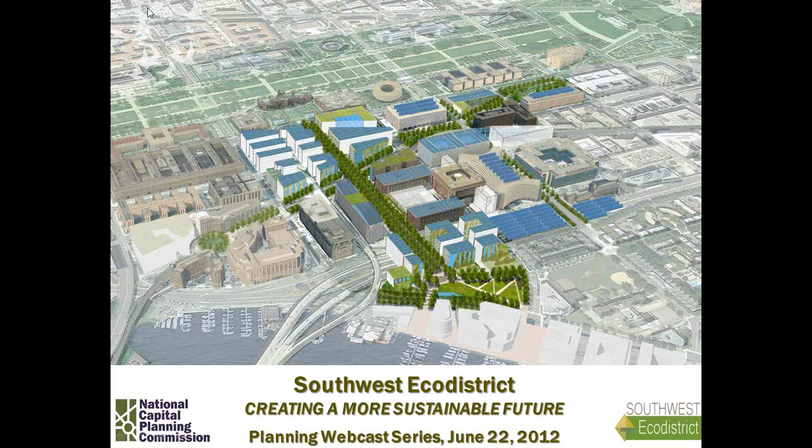And how we're actually taking this 110-acre area and turning it into a vibrant, highly sustainable, livable, well-connected community.

So many of you might be asking what is an eco-district. It's a term that is becoming more commonly used. In fact, we have about 5 different initiatives taking place here in Washington, D.C., and I'll be so bold to say that ours is probably one of the most ambitious. An eco-district is a comprehensive and forward-looking approach to urban sustainability and livability. The premise is that we're planning development and infrastructure at a neighborhood or district scale, which we believe can attain greater sustainability and economic benefit than planning at an individual building scale, which has been our recent focus. Now we're trying to move back towards that neighborhood scale.

I'm going to talk a little bit about why we think now is the time to capitalize on the momentum to do this, and then Otto's going to talk about how this area will actually become a highly sustainable mixed-use community, and the results we're going to be able to achieve. Then I'm going to wrap up about our cost-benefit analysis and the work we're starting to do there, and how we're looking towards implementation. We'll be happy to take anyone's questions to wrap up. So with that, I'm going to ask for the advance slide to get us started.

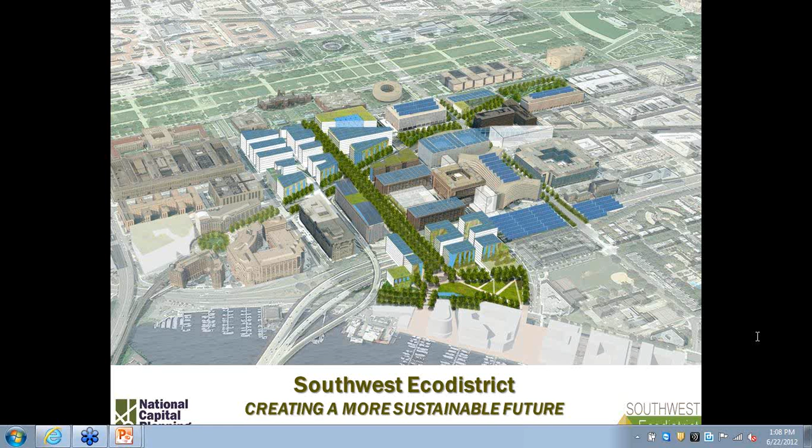Just a quick overview, as I said, I was going to give a little bit of the backstory of the eco-district work. This actually started back in 2005. There were 4 different planning initiatives going on within Washington in the Central City area.

We had the District of Columbia, shown in the light peach color. They were looking at how to focus economic development activity, and where they were going to concentrate their efforts to revitalize communities. The National Park Service was undertaking an ambitious plan on how to improve the National Mall, shown in green. And then the Architect of the Capitol was actually doing a campus master plan.

The areas in blue actually cover the area that the National Capital Planning Commission worked on, and how we were trying to improve the destinations and bring that civic quality of the mall off of the mall into the city, but also to start infusing the vibrancy of the city and downtown into our civic core.

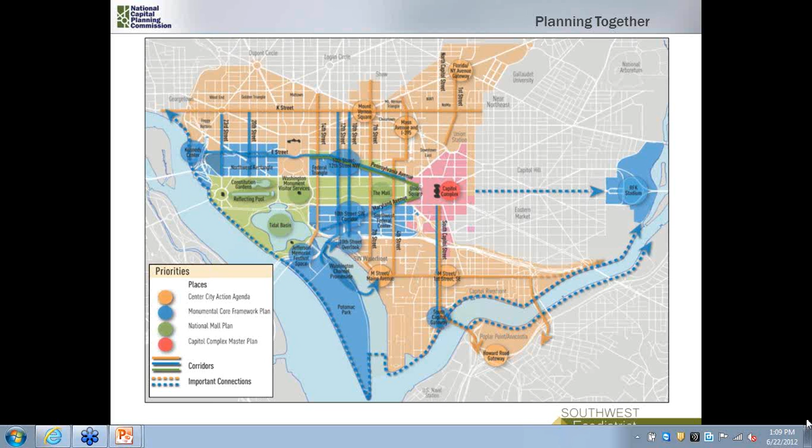What was interesting is a lot of people in the very early days were confused about how all these different initiatives fit together. So the 4 planning agencies got together, all the project managers started talking, and we came up with this diagram that really started to change the game. It became a very clear tool on how these 4 different jurisdictions, both at the local and federal level, were working together, and really how it started to make sense. The bubble areas show what we call our destination areas, areas we all agreed to focus on in trying to create new destinations or new communities. All of the lines show how we actually make connections between those areas.

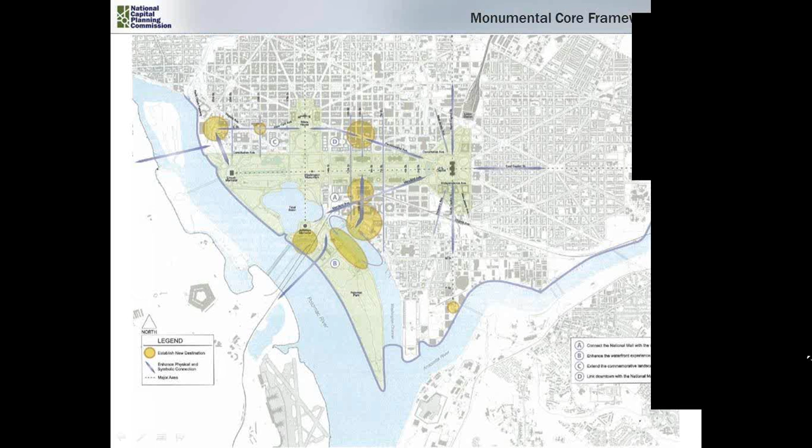Moving on. This actually is the monumental core. This shows where our big moves are, and we focus on the areas surrounding the National Mall. We actually pulled together a task force of federal and local partners, about 12 that served on that. It was actually a steering committee, and they basically helped set the direction for this overall vision.

As you all know, doing what we do as planners, we looked at these areas surrounding the National Mall and started looking at the different systems. Here in D.C., particularly, we're looking at views and symbolic connections, our land use mix, transit, and the public realm. We started to layer all of these to look at how we could create these great new destinations and connections within the monumental core.

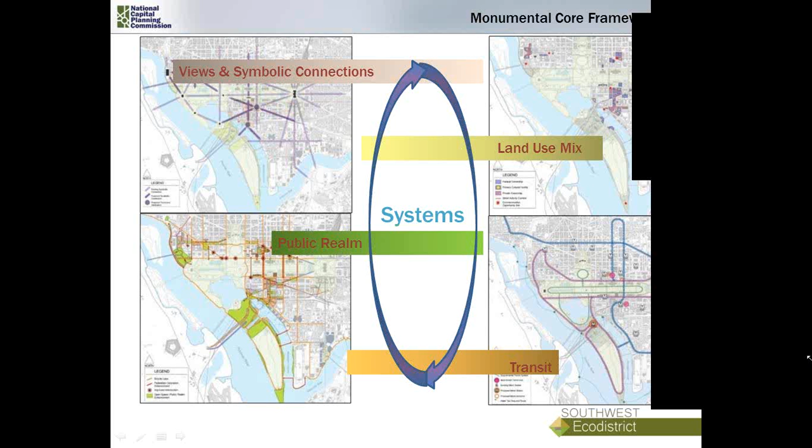This was deemed to be the cornerstone project of the Monumental Core Framework Plan because it's where we felt we could really achieve the greatest results. And quite frankly, it was also the area that needed the most help.

Just a little bit of background on how this area has transformed over the centuries. This was one of the first neighborhoods in Washington, D.C. Being on the Potomac River, it was part of the maritime industry and an important local port, and it was also near Fort McNair, an important military base at the time. It had a very fine-grained fabric of dense row houses mixed with stores and shops. It was a really mixed-use community.

As the city started to grow and develop, this area didn't get the attention it needed, and there were a lot of unsanitary conditions. By the 1930s, there was enough concern that planners started looking at how to revitalize it. The Capitol, which you don't see on this map, sits just off to our east if we're looking west. You can see the Washington Monument up there in the top right corner.

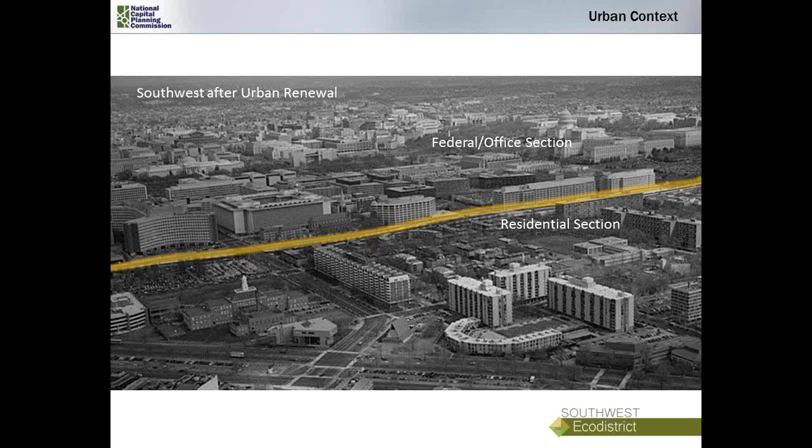This was during the era of urban renewal. The planners came in and basically razed about 400 acres of city fabric and displaced about 23,000 people, and essentially planned a community that looked much like this. They took that mixed-use community and created residential garden living areas to the south of the highway. The line going through the image is the southeast-southwest freeway, which we'll talk more about in a minute. The area to the north became basically an office park, predominantly of federal offices.

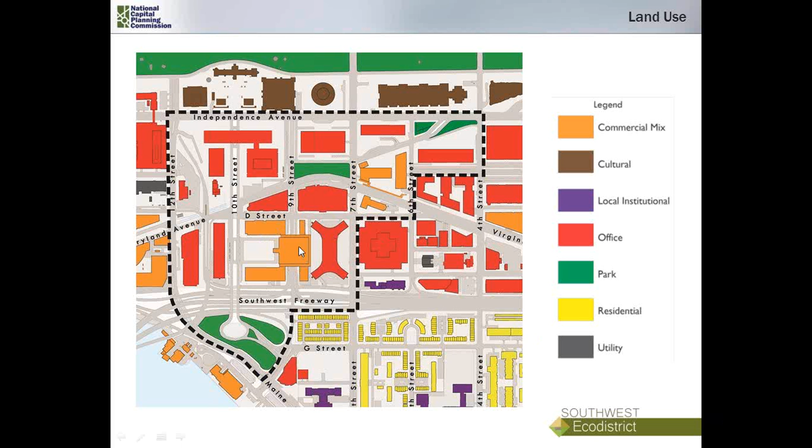I know that probably every area of the country has a part of their downtown with these kinds of conditions. So it's been a bit challenging figuring out how we actually transform these areas into a walkable, livable community.

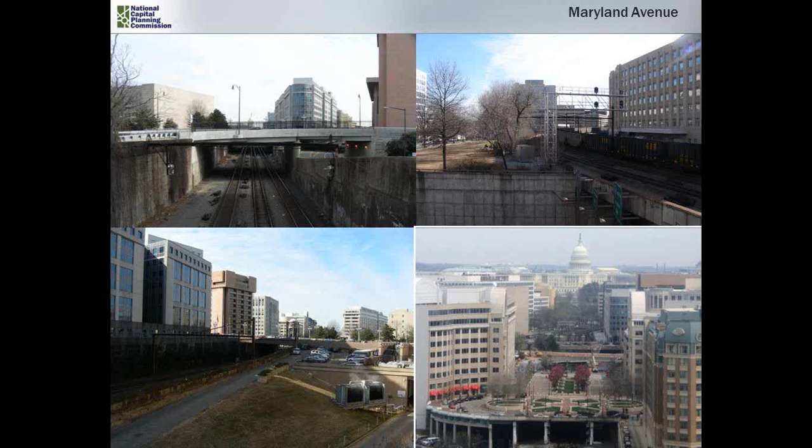Also going through our study area is a railroad that was built in the 1800s. This slices right through the community. Along this railroad, the buildings turn their back to it, creating a very industrial place right in the shadow of the Capitol. In the top left, you can actually see the Capitol peeking over that elevated bridge.

A portion of the avenue was actually decked over in the 1990s, shown in the lower right, and the Portals development was constructed. This is really the only accessible area from this corridor at this point in time. I should also mention this is Maryland Avenue. If you picture the plan of Washington, Maryland Avenue is the sister street of Pennsylvania Avenue, which runs between the Capitol and the White House. In this instance, Maryland Avenue is that link between the Capitol and the National Mall towards the Jefferson Memorial.

This is a freeway that runs through our study area as well. It's about 10 to 12 lanes of freeway, plus another 5 or 6 access roads. It creates a tremendous barrier in the community.

Because of having to get the streets in this area over the rail and the freeway, we have a lot of challenging level changes. This starts to give you a sense of some of the challenges we're facing. When you're down in this area of the city, it's very difficult to walk from point A to point B, and it's even confusing to drive.

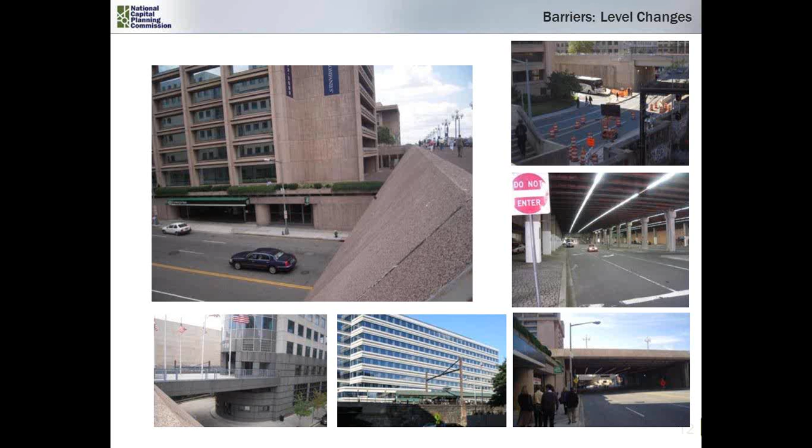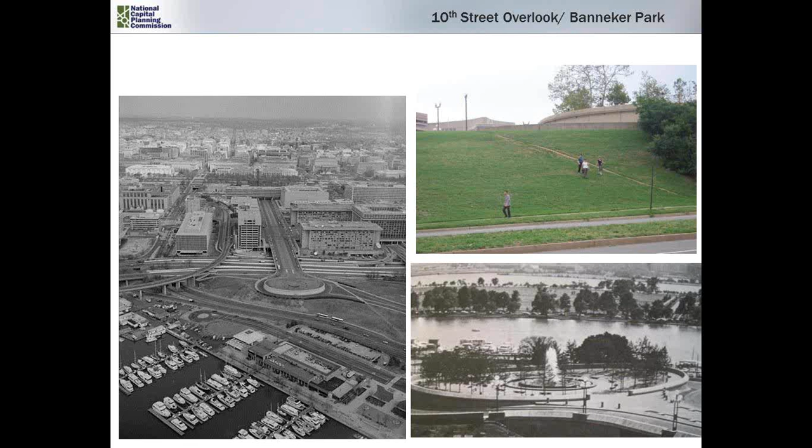So these are some of the challenges we're trying to correct in this area. I should note that the Kiley Fountain is entering the point in time where it could be deemed eligible for listing on the National Register, so this is one of the considerations we're having to think about in our planning work.

As we started our planning work—and this will become more significant as Otto talks about our recommendations—we're having to straddle what is historically significant, what should we start preserving, and what areas we can actually modify. These buildings, because of their relationship, urban forms, and architectural style, make it very difficult to weave them back into a more walkable, mixed-use neighborhood.

This is actually the Monumental Core plan. So we took all this information—this was the predecessor to the work we're going to focus on with you today.

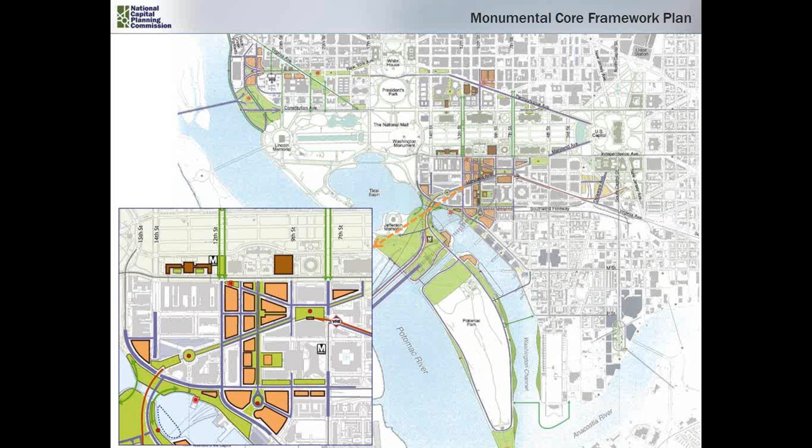This is the Monumental Core Framework Plan that looked at these primary destination points and where we concentrated our recommendations. I wanted to point out, as a contrast, in the bottom left, our initial concept for 10th Street, which heads south between the Smithsonian Castle down towards that cul-de-sac. When Otto gets into his presentation, you'll see how that vision has been refined and how it contributes to our eco-district goals.

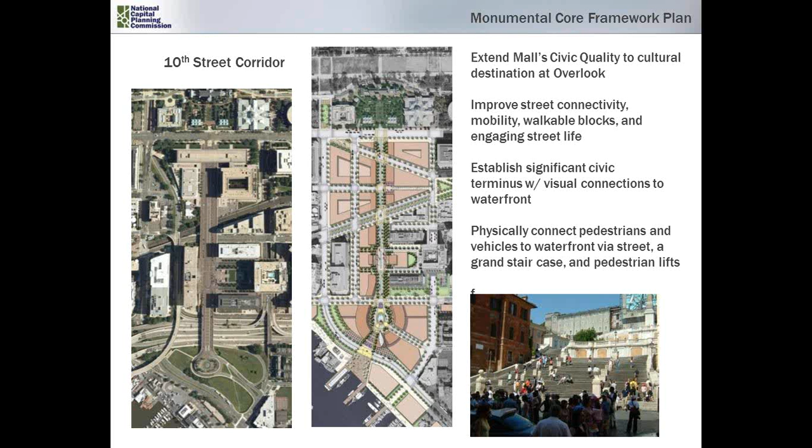This is just a close-up illustration of that. One of the things I wanted to talk about is when we did the framework plan, between 2005 and 2009, we brought together all of our stakeholders and pulled together a lot of good ideas that had been proposed by different planning efforts over time. So many of the ideas came from different places, with some new ideas as well. We reinitiated that planning process to bring current decision makers up to speed and help build a vision and consensus with them. This was a very dense urban idea—we never necessarily expected it would particularly look like this, but this is how we got started.

One of the very important things we did was really try to illustrate a feeling or context of what we were trying to create, to communicate the recommendations we thought were important in transforming this area. I'll note that in the very early days of this work, not all of our steering committee members were fully supportive. They thought our recommendations were a little too bold, perhaps too aggressive, and a lot of what went into our ultimate plan was very negotiated wording.

So a lot of the recommendations involved wordsmithing to get everyone comfortable. For example, one of the big recommendations that came out of this plan is that we redevelop the Department of Energy, which is the site shown here on the right, looking towards the Smithsonian Castle—a very different urban context.

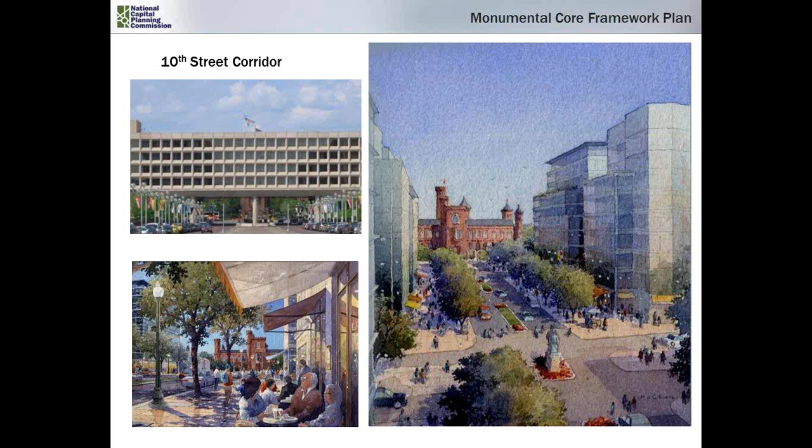And so the questions came up: well, where's the Department of Energy going to go? How are you displacing these workers? And so a lot of our recommendations took care of those nuances. And the reason I bring that up is that was really important in getting their buy-in to this, and allowing us to go to that next step that Otto's going to really focus on here in a few minutes.

Next, this is just another area of our plan. So I just talked about the 10th Street corridor, which is that north-south corridor there. It's hard to describe without a pointer. You need to kind of point where that is, because we're going to be referring to this a lot. Oops, maybe not. Sorry, technical difficulty.

Anyhow, so that north-south street is called 10th Street. The diagonal street that goes from the northeast to southwest is Maryland Avenue. And that street is actually that rail corridor that I showed you a picture of a little bit ago. You can see that rail corridor there in the bottom left. And again, this is just some of the big vision ideas that we use to build our recommendations and to start to build some consensus around how we might transform this particular area of the city.

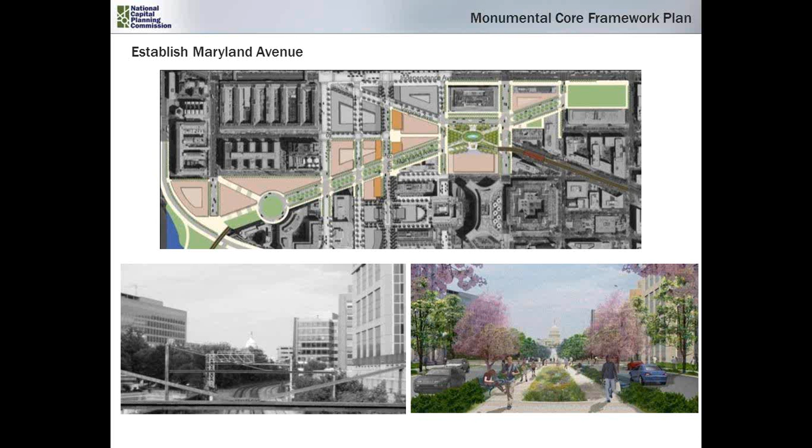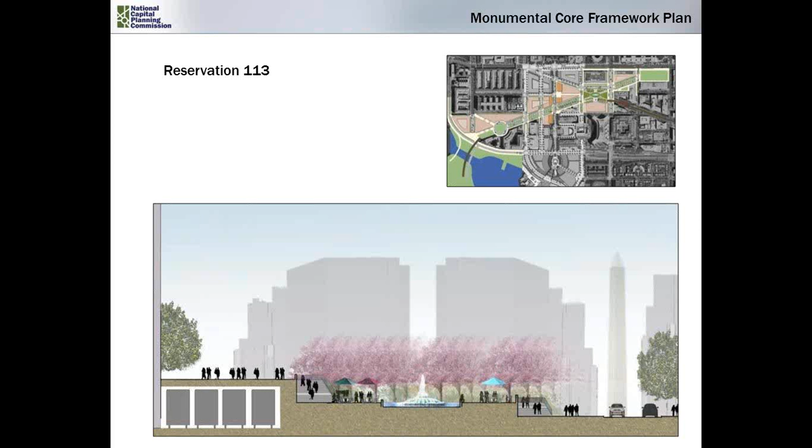And I really wanted to put this up because one of the most challenging areas within this plan is how we would actually deck Maryland Avenue to maintain rail service through this area, but also make it a pedestrian place. And the section here at the bottom is actually the park shown in the upper plan. That's a very important reservation in Washington. It's actually the cross-axis of Maryland Avenue and Virginia Avenue, and on axis with the Washington Monument. However, if you were to stand in this park today, you wouldn't see the monument because the Department of Energy is actually blocking it. So this proposal shows the kind of view corridor we might be able to recreate with this new planning work.

So the Monumental Core Framework Plan was about a 4-year process to go through all the planning work, the public process, the consensus building that was necessary to get it approved. And it had 3 main goals. One was to protect the National Mall and create new cultural destinations off the mall, but also to protect the federal office space, as well as create new places to work, live, and visit, and how we could actually transform the 10th Street and Maryland Avenue corridors into this vibrant mixed-use community.

I would also like to point out another part of the backstory: when we started this work, our intent was really to protect the National Mall and find new cultural destinations. As we got into the work, we realized we really couldn't do that until we met those last 2 goals, which was also how we're going to protect the office space and how we're going to create a mixed-use community. So it turned from improving the settings for future museums and memorials near the mall to more of a revitalization plan that would really create a true community.

So a lot of the work that Otto's going to talk to you about came from this foundation, but another critical point in the process that really helped us gain a lot of momentum was Executive Order 13514, which is Leadership in Environmental, Energy, and Economic Performance. This was an executive order signed by President Obama in 2009, and it basically was a transformative shift in how the government does our business. It makes greenhouse gas emissions a priority for us and how we can reduce those gas emissions and really become a leader and push that industry forward. This executive order gets very specific on the targets for energy, water, and waste reduction, and we use those targets as one of our bases for setting our goals within the eco-district.

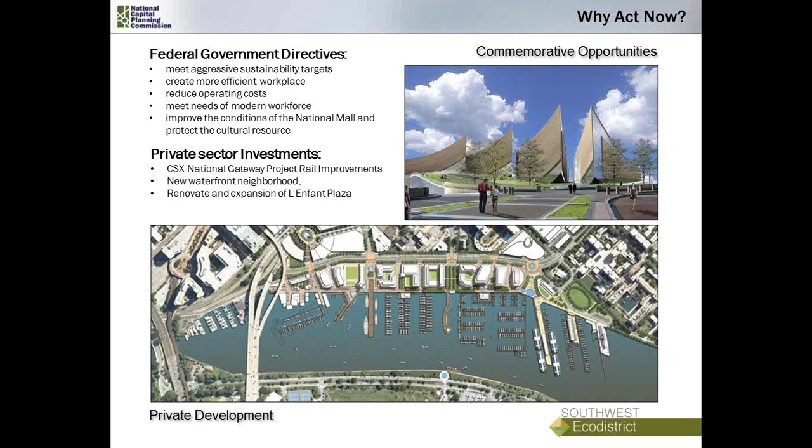So I covered this before, but just to recap, and I'll start to hand this over to Otto—so what is an eco-district? Here in D.C., as I said, we've got about five going on. One in our downtown area is looking primarily at energy amongst a large group of private office buildings.

The District of Columbia is looking at doing an eco-district master plan for a former federal campus that's going to be going private. So what I'm trying to get at is that all these eco-districts have a slightly different definition. This sets up the definition we're using for our eco-district, and our main objectives are to capture, manage, and reuse energy, water, and waste beyond a single building to a group of buildings, handling those resources within our eco-district boundary.

So we basically want to use and reuse energy, water, and waste to make those resources most efficient within our study area. But we also recognize it includes important transportation choices as well as a mix of uses that will create a neighborhood. And in order to be a successful neighborhood, we need a connected system of parks, plazas, and open spaces to make this a walkable community.

So a lot of our specific recommendations, strategies, and guidelines contained within our plan actually go toward trying to meet these particular objectives.

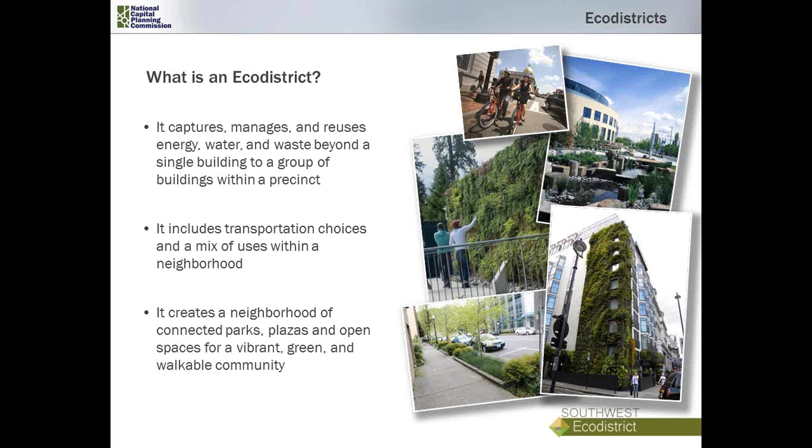This is the study area I wanted to mention here. The red boundary shows the area that the National Capital Planning Commission focused on with our task force.

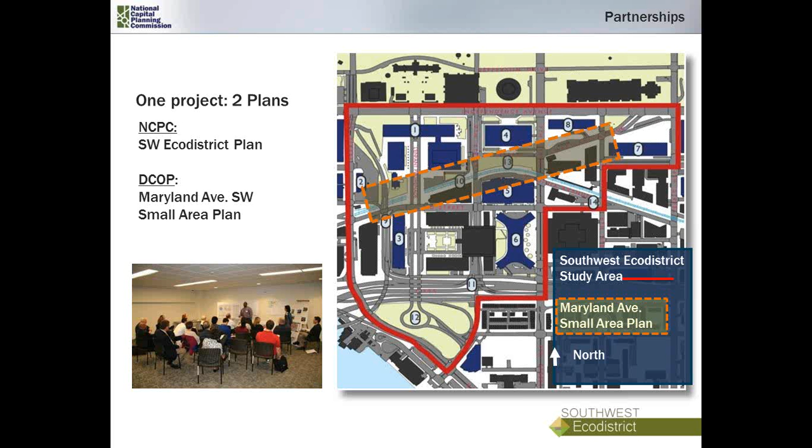After we finished the Monumental Core Framework Plan with that 12-member steering committee, we formed a 17-member task force. That task force focused on the area within the red boundary, but the District of Columbia had a specific interest in the area within the orange boundary, the Maryland Avenue corridor. So essentially this project, even though it's one project, had two very important components, and it established a close, collaborative, cooperative working relationship between the federal government and the District of Columbia, which isn't always easy since we sometimes have competing needs.

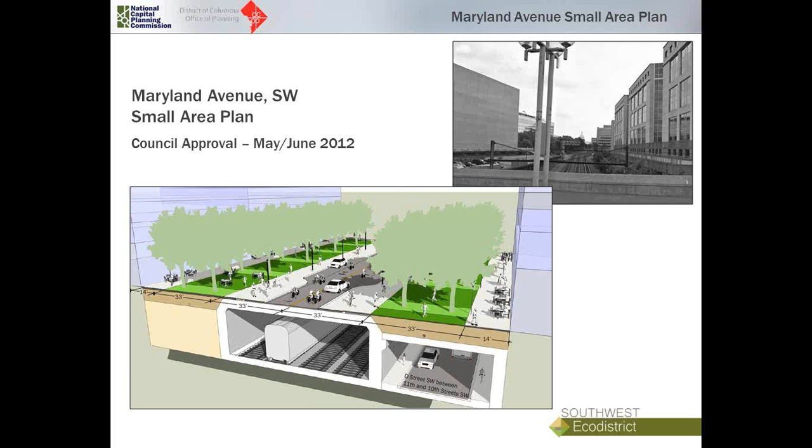We just attended the Maryland Avenue plan, which was just before the City Council yesterday, on Wednesday. So that plan is in the midst of obtaining council approval, and they're currently looking at how they might actually fund some of these improvements.

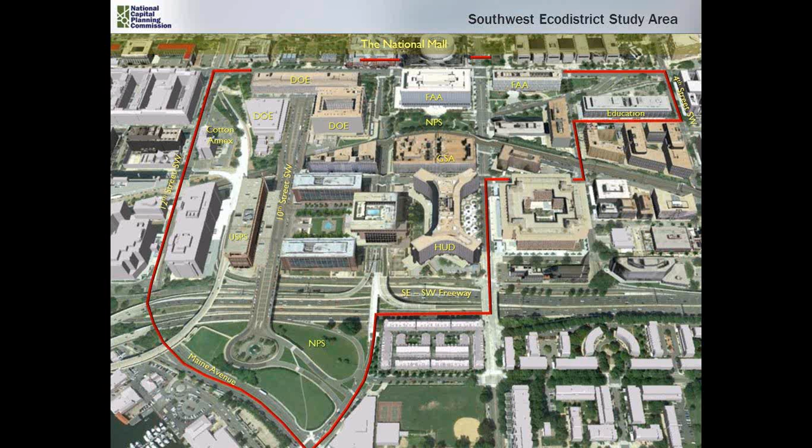And so this is our study area, what it looks like today. Talked a little bit about that already. It's about a 15-block area, 110 acres. About 60% is owned by the federal government, about 22 to 25% by the private sector, and then there's about 15 to 17% that is actually infrastructure. So infrastructure takes up an incredible amount of real estate within this area.

So our mission is really to transform the 10th Street and Maryland Avenue corridors into this well-connected place where we can commemorate, live, work, and visit, but to do it in a way that showcases sustainability. And that's what we're going to be focusing on with you now. So next slide, please.

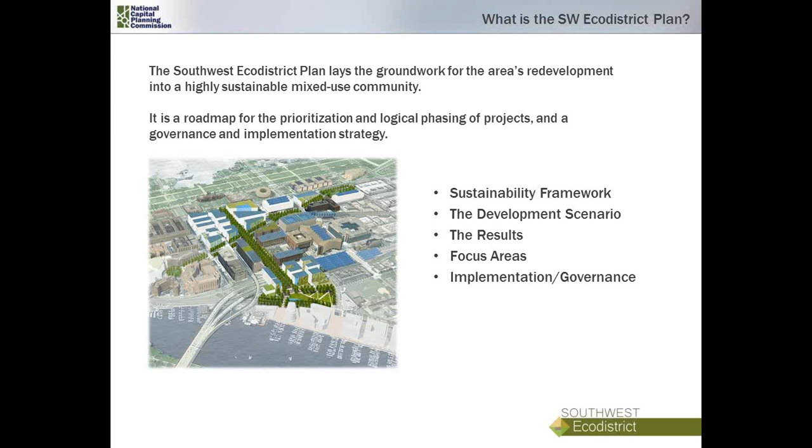Before I hand it over to Otto, just wanted to mention that we are in the midst of literally doing the final edits to our draft plan. You're actually getting a preview. This plan has not yet gone fully public. We're going to be taking it to our commission on July 12th and releasing it for public comment on July 12th. There'll be a 60-day public comment period before we incorporate those changes to wrap it up and take it back before our commission for approval. Next.

So I'm going to turn it over to Otto, who's going to talk about how to achieve a highly sustainable mixed use. No, I'm not quite yet. I'm sorry. I've got a few more slides, and I'll turn it over. So now we're going to talk to you about how we're achieving this sustainable mixed-use community.

Just some background. Before we actually started looking at our strategies, we did a market study. The city actually helped pay for this market study, but we looked at the market within this area, and we used this study as a basis to help us set a baseline for what our use mix might be for a successful mixed-use community.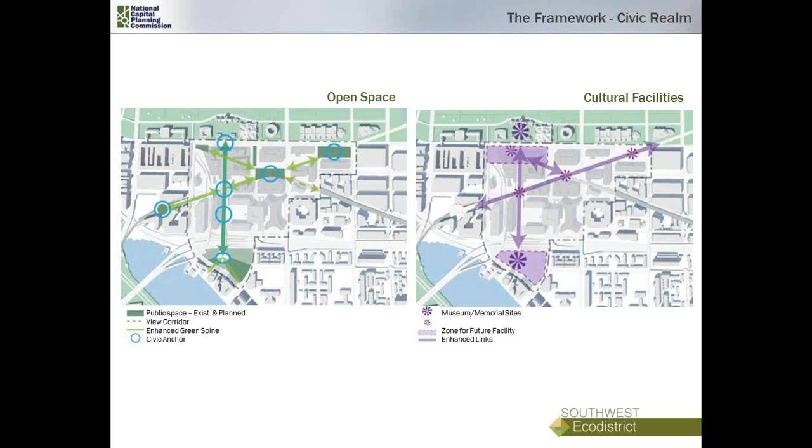We then focused in on the systems within this particular area. So we looked at our open space system and how we could connect these important public places, how we could create these new cultural destinations, and how this open space system and these cultural facilities would relate. We also looked at our land use mix, which is basically a mono mix at this point. But we looked at where we would focus our federal and cultural uses and where we would focus our mix of uses.

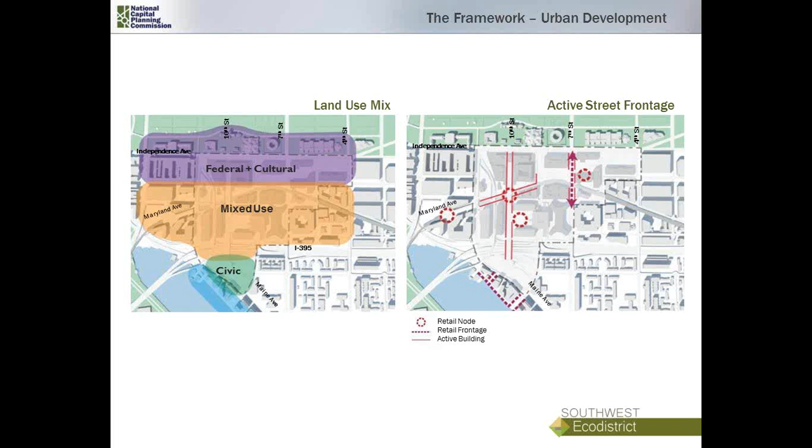I would like to note that this doesn't mean that you wouldn't have a private development in that federal cultural zone, but what we're trying to communicate is that within that zone, we want it to feel like it's part of that civic community, that it's part of that monumental core. It has an identity more like what people perceive as the nation's capital versus a maybe a little messier, more vibrant mixed-use area.

We also did a couple of different transportation studies as background work. We did a pretty extensive study looking at all of the elevation changes within this area and how we would actually connect the street grid, physically how we could make vertical connections as well as horizontal connections. This was very important in basically eliminating potential development scenarios that just wouldn't be feasible.

And then, once we came up with our development scenario, we did a broad conceptual transportation analysis, at least at this point in time, to give us a sense of what kind of additional automobile traffic we may generate versus what transit.

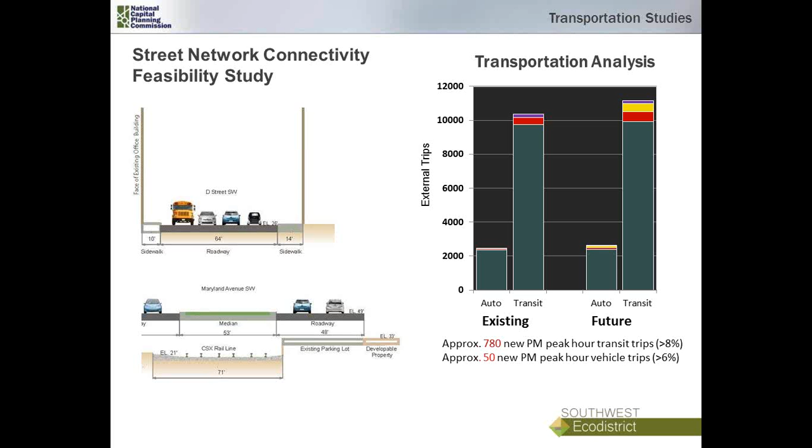One of the things I should mention is that this area of the city is probably one of the most transit-rich. It's got 4 metro lines that come into it. There's 70,000 employees that work within this area. And what's interesting is that the transit system is actually starting to operate at capacity. So one of our major objectives is to look at how we can expand the capacity and actually bring more commuters into this area.

So these two diagrams start to show the street grid. So one of our main objectives was how we could revitalize this area to reconnect the street grid, basically kind of minimize all those different vertical elevation challenges that we have so we could get better connectivity within the area. And then we also looked at how we would bring in all the transit to an important transit and intermodal hub within this area.

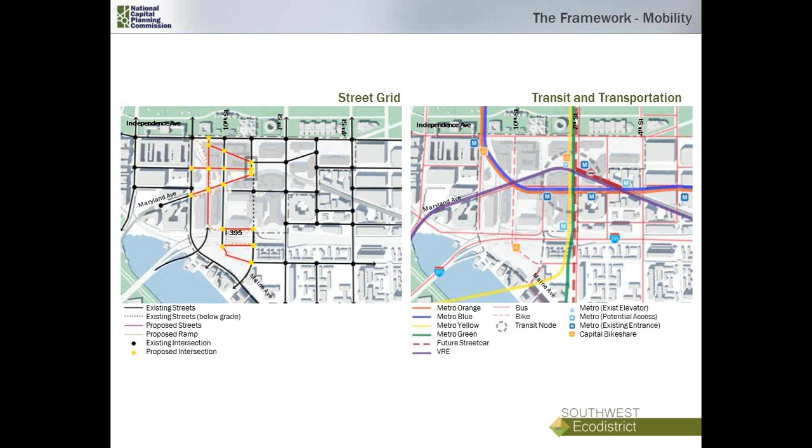And the other thing we looked at was the character of the streets. So our guidelines start to set up strategies and recommendations on how we make sure that we start to blend the federal city with the local city in a way that respects both but also begins to integrate them. So we have civic streets, monumental streets that might feel more like the federal city, but also start to bring in a mix of use.

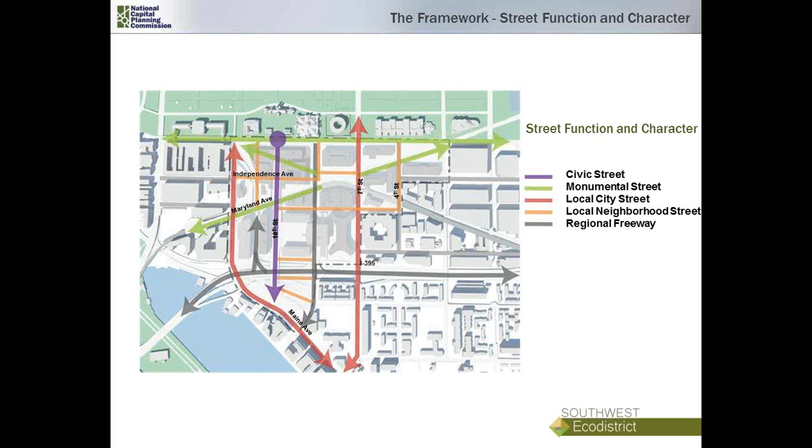But then we also have those streets that help the city function well, which are those local city streets that bring commuters through, as well as the local neighborhood streets that support a lot of the functions that are needed to make these buildings viable. So with that, I'm going to turn it over to Otto, who's going to talk about our sustainability strategies and recommendations.

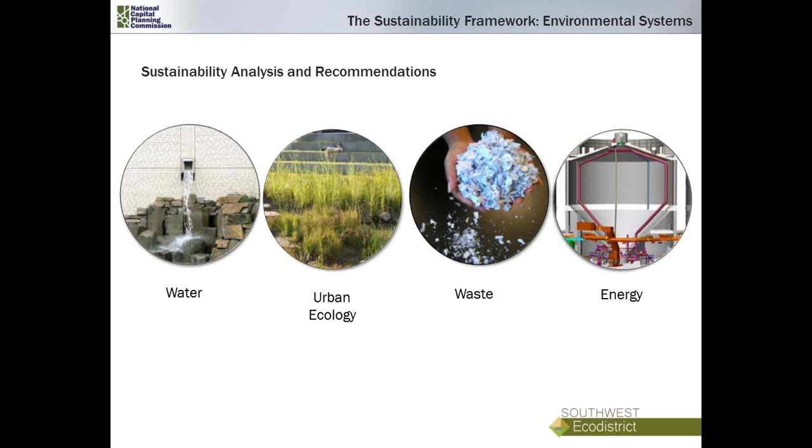Thank you, Elizabeth. To complement the design physical framework, we did identify the four areas for sustainability strategies, which you see on the screen are water, urban ecology, waste, and energy. Working with our consultant doing engineering for us, one of the charges of the plan was to make a business case. So to do that for sustainability, we really needed to find out the metrics of all of our recommendations.

So what you see here is a couple spreadsheets, but we basically did some conceptual modeling, first starting with all the existing information we had from square footage, the energy use for all the buildings, the population, the water use, all the waste and recycling that was done for the buildings. And then as we started to build scenarios, we could identify what the population increases were, the water use changes were, the energy use for the buildings, based on different recommendations for how the systems may be applied to rehab or for new construction.

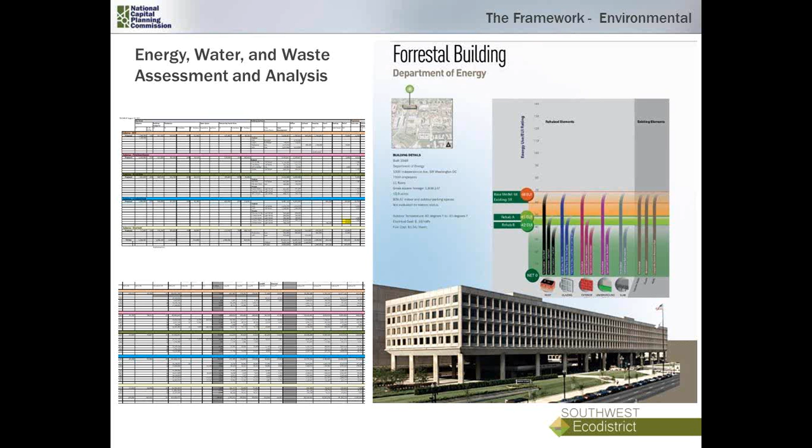The first thing to talk about is the water. So if you take the study area, about 92.4 million gallons of water fall on the site. In DC, stormwater management is a critical issue. Working with the EPA as one of the task force, they identified that the water that fell on the site did not need to go back into the Potomac, which said that we could actually collect the 92.4 million gallons and use it for replacing potable water, since right now potable water is used for everything.

That's also part of the executive order, to reuse all the rainfall from a 95th percentile event. In terms of the potable water, right now it's about 18 gallons per square foot. As we looked at all the future development, our target was to hit 9 gallons per square foot.

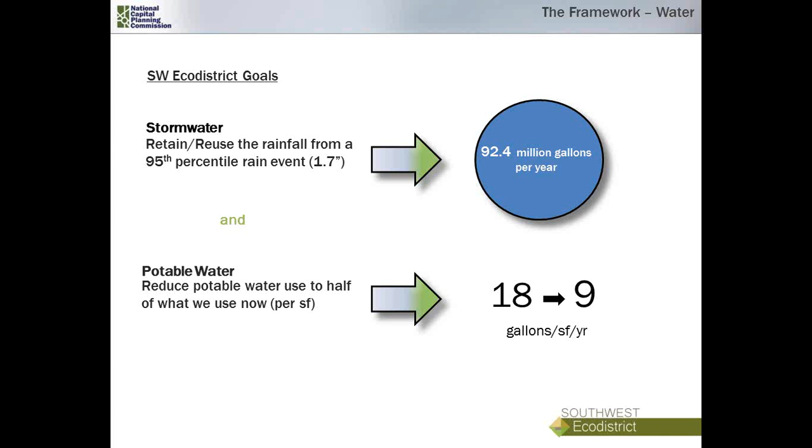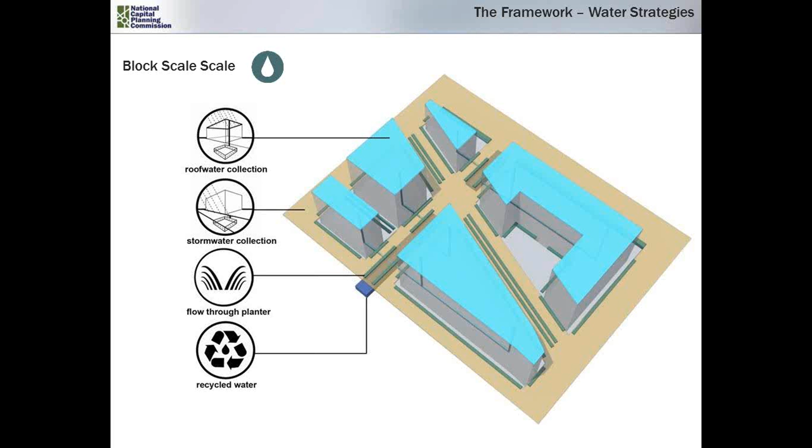To do this, we were looking at collecting stormwater off the roof, collecting it on the ground, using flow-through planters to support better irrigation, and then also recycling water so that we could basically create a gray water system for the flushing of buildings and non-potable uses.

One of the critical issues for doing stormwater collection at a district scale is that current regulations require that right-of-way collection is done by the district and individual properties is done by the properties, and combining the two isn't allowed. So it's one of the pilot recommendations that has come out of the plan that we can actually collect stormwater across properties to use for a district collection system.

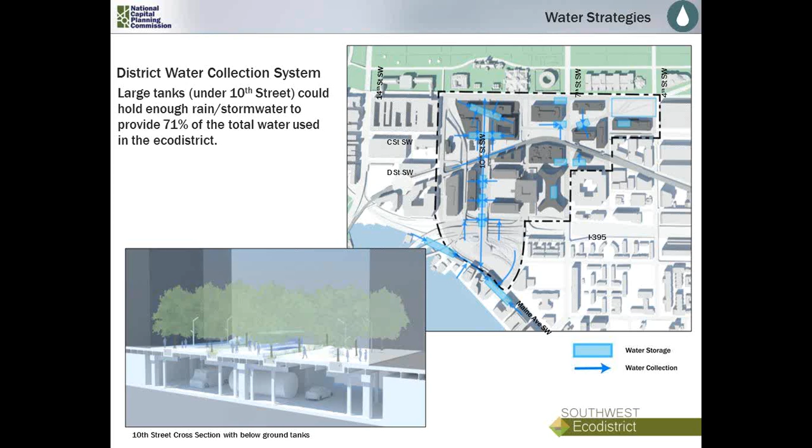Urban ecology. In looking at the water strategies, we wanted to use the stormwater so that it would actually help to create an environment on the street level that people can experience and that can help to reinforce the natural habitat. So the idea was, and I'll get to it later, that maybe green roofs aren't the best use if we're trying to also do energy, but to actually bring the stormwater down to the ground. That will help to reduce the heat island effect, help the vegetation along the ground plane, and really promote green infrastructure that creates a better place that people want to be, which right now, as you've seen in some of the photos, is really pretty much a concrete wasteland.

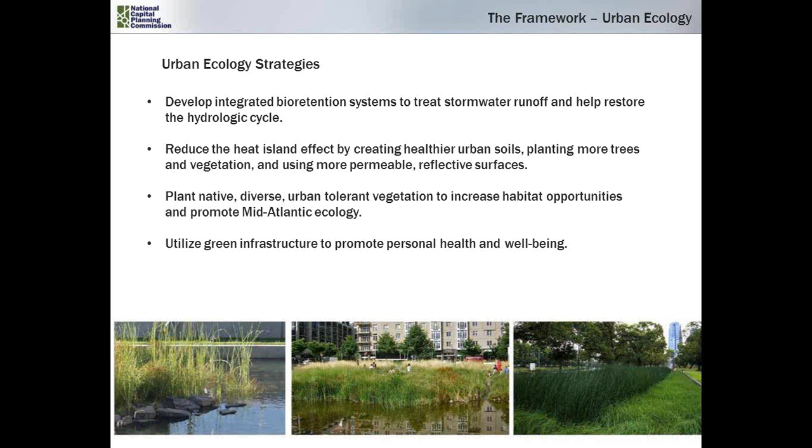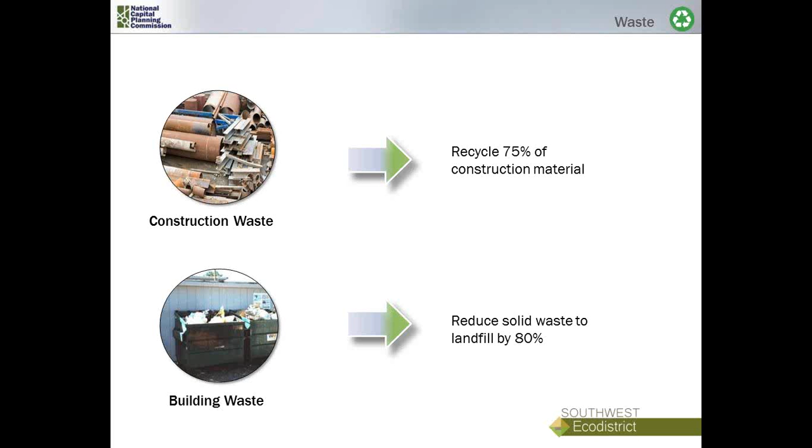So for construction waste, as we're looking at all the new construction, the goal is to recycle 75%, and for building waste, right now it's about 30% in some cases, really to reduce all that, reduce the solid waste that goes to landfill by 80%.

Our recommendations are really built on 3 tiers. We started looking at the building scale, which is really what you might sort of parallel with LEED measurements. And part of the eco-district is that it has to go beyond a simple building scale. So then we built up to a block scale and finally the district scale.

In terms of waste, the diagram here shows that at the block scale, which is essentially, or what's illustrated is the north end of 10th Street, showing that each of the buildings can have a recyclable waste. Black water will be collected.

We did look at a black water system for the district, which can be pretty expensive, and as the District of Columbia is now looking at an anaerobic digester down at the Blue Plains facility, one of our recommendations was to actually not try to handle black water within the district, but actually use the District of Columbia system.

We are also looking at collecting the gray water for new construction when there's a dual pipe system, so that can be channeled into the cistern and then recycled and cleaned.

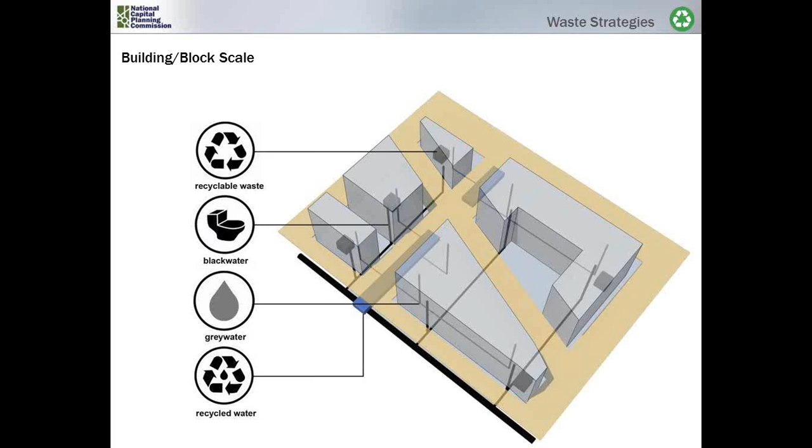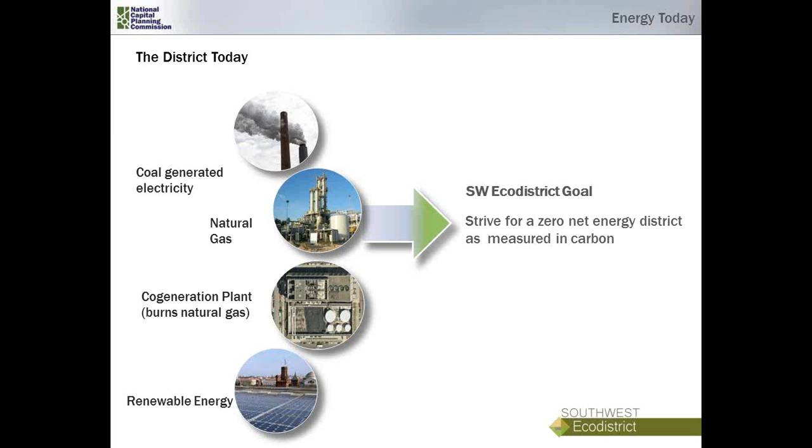Energy is probably the biggest strategy for the district. Fortunately, there's currently a cogeneration plant in the area which burns natural gas. As part of the target was to hit a zero net energy district as measured in carbon. Currently, the cogen plant burns natural gas. So down the road, I think 2030, to actually hit net zero carbon, it will need to be a decarbonized system, which there are some technologies so it's not burning natural gas. It can be things we're still investigating.

As we look at the buildings, the building improvements, as you saw in some of those photos, they're 1970s buildings. Their skins are pretty inefficient. A lot of them are basically failing. So our strategy looked at, and we did modeling, was what if we rehab the buildings lightly, which is basically all the systems, versus doing a full rehab of a building, and then comparing that to new development.

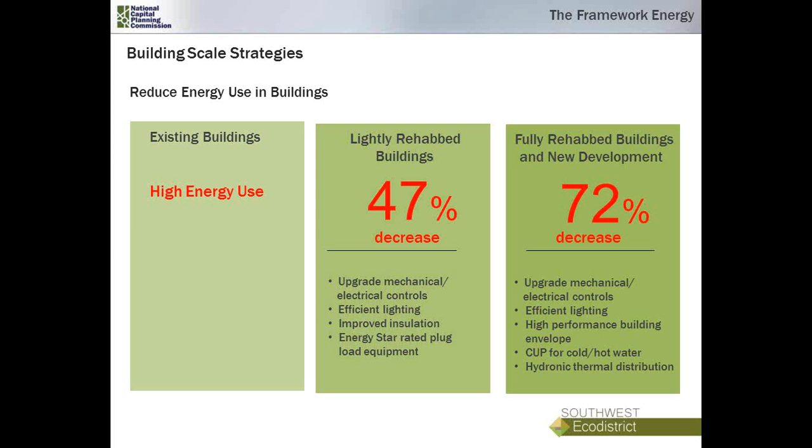By doing light rehab buildings, which is upgrading the mechanical systems, improving the lighting, improving insulation, and addressing the plug loads for all the equipment, we could probably get a 47% decrease in energy usage. If we fully rehab the buildings, which is basically ripping them down to the structure, or a new construction, we would basically have a 72% decrease in energy usage.

As we look, that was for the buildings. For the district, and for the block scale, we've conceptually modeled how much solar thermal we may use on our rooftops, how much solar PV we would use on all the rooftops.

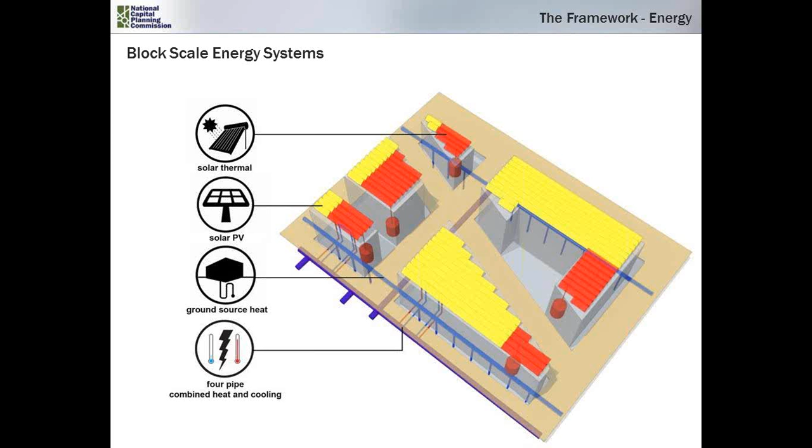the cogen plant. Another issue that will need to be addressed to make the district system the most efficient is to balance the daytime uses of office with residential and hotel uses. Currently, by congressional rule, we cannot connect private buildings to the cogen plant and that system, so that is another recommendation, that we have to kind of think outside the box to allow private sector, non-office development to connect to the cogen plant to actually make it the most economically efficient system possible.

We're also looking at sewer mining, which is essentially ground source heat, to, on the southern end of the district, absorb the heat from sewer water, which comes out of the buildings at anywhere from room temperature, 72 degrees, so we can actually absorb the heat off of that to provide heat for the buildings. It's another technology that's used in France and around the world. It's been pretty popular now in Vancouver, BC, and it's something that it's time for it to do in the U.S.

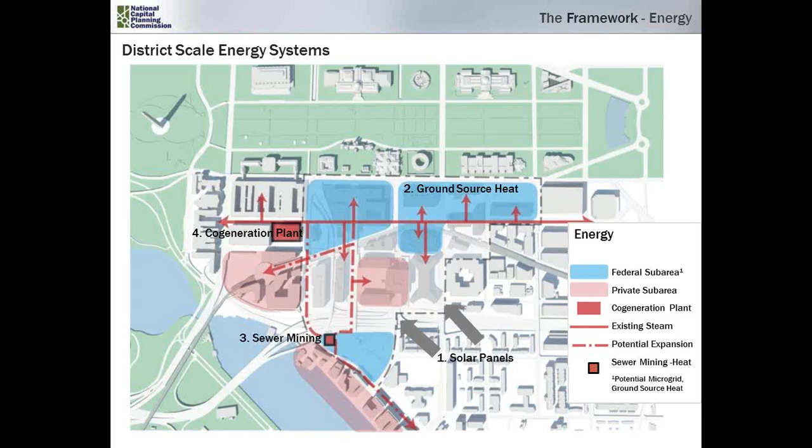When you start a plan like this, the RFP often says you have to do so many scenarios, like you figure you're going to do 3 scenarios. But as we were modeling our various strategies, it wasn't an idea of scenario 1, 2, or 3. It was actually a more holistic strategy that evolved, with multiple approaches in order to achieve all the goals we were trying to hit.

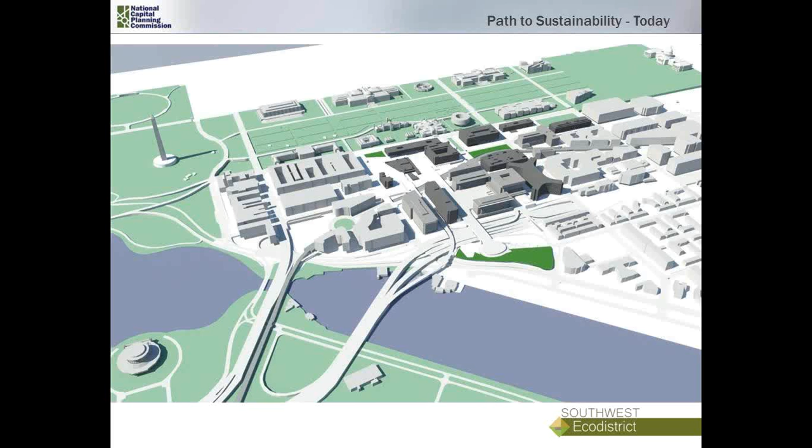So this is a sequence going through the strategies by building scale on what would need to be done to achieve all the targets for both environmental goals and creating a sense of place with population and mix of uses. Here, all the light gray are private buildings. The darker gray are all the federal buildings within the district.

The building to the north of that is, there's the 2 FAA buildings. That's Orville, the FAA building, and the other building to the right of it is Wilbur.

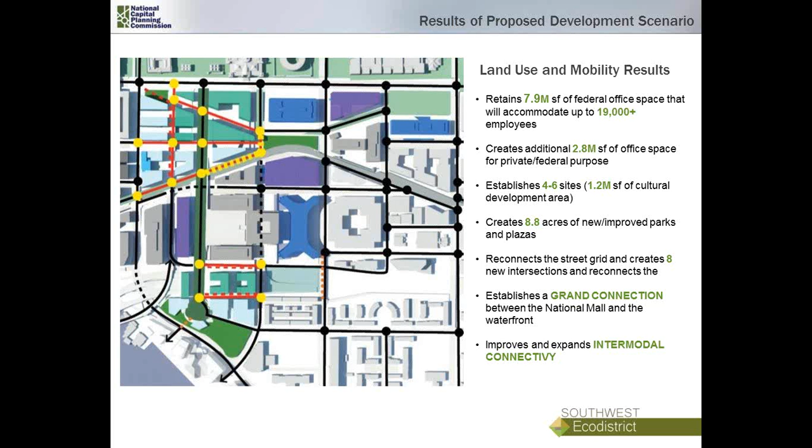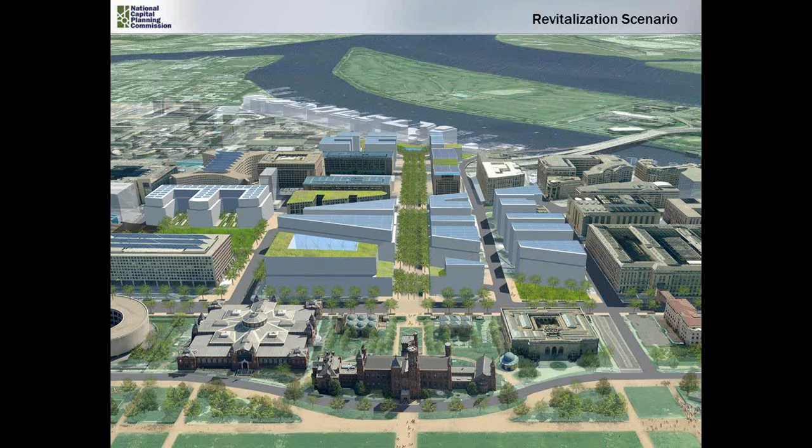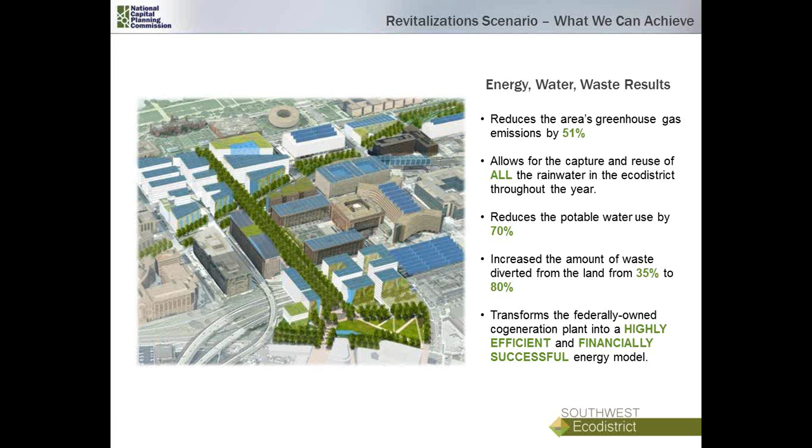So what are the energy, water, and waste results? With the development and all the strategies, we can reduce the greenhouse gas emissions by 51%. We plan to use all the rainwater within the site, reduce the potable water use by 70%, and increase the amount of waste diverted from landfills from 35 to 80%.

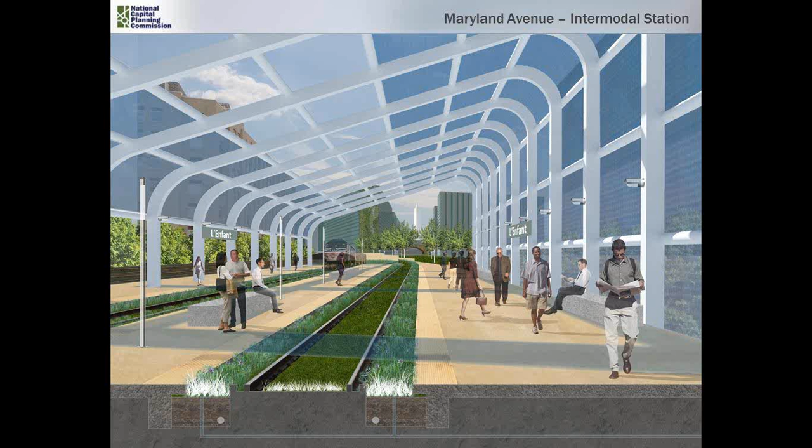Here you see that the DOE site has been redeveloped to create the view to the Washington Monument. The idea is that the transit facility could be redeveloped—we're showing grass tracks because every strategy to capture stormwater would be used, creating canopy which would be photovoltaics to provide energy and also some protection from the heat of the summer in DC.

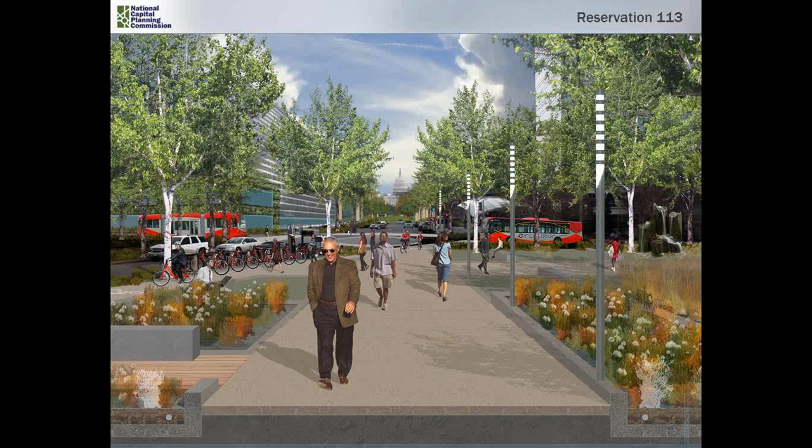Here's another view from Reservation 113 looking up to the Capitol, the existing view. Here's a revitalized, redeveloped Reservation 113 Park, which would have extensive native landscaping and stormwater management. You see the streetcars coming in to the left. It becomes the transit hub connecting the existing regional train system, the metro system, future streetcar, and future buses, while creating a strong connection back to the Capitol.

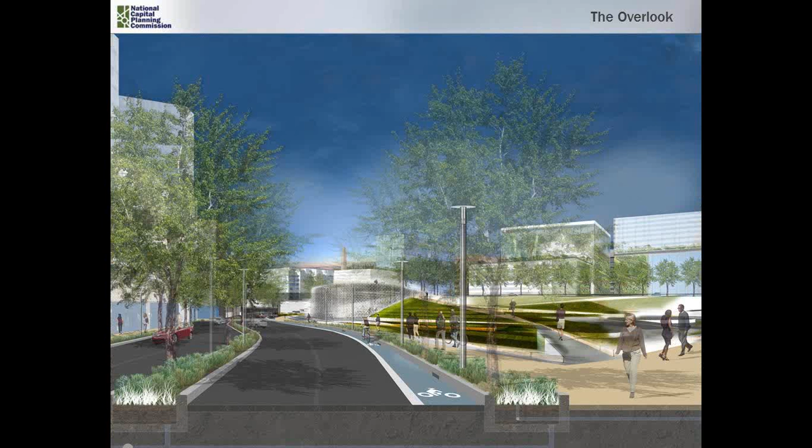The idea is that this would really become a high-performance demonstration extension of the mall. Instead of being down on Maine Avenue, you can look here, and the green will pull you up into 10th Street, so you really feel connected back to the National Mall. We're showing an overlook.

We're showing multimodal connections along the street for bike improvements, and the images to the left are the future developments along the riverfront. Again, trying to think of all the views, here showing the visual connection back to the Washington Monument.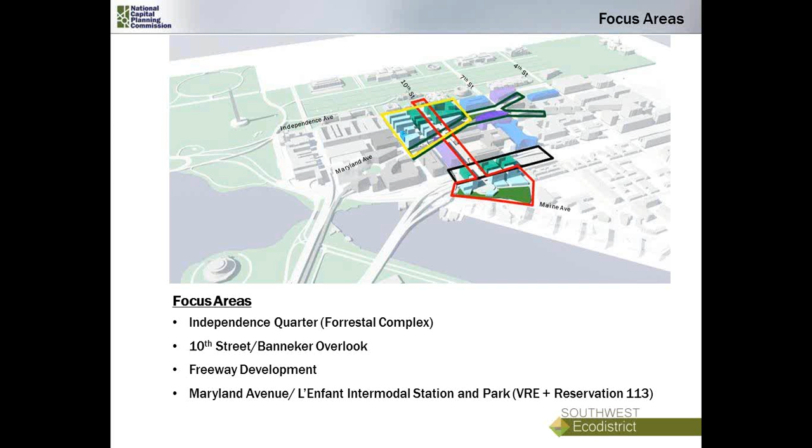So there's a lot of recommendations. To make it more manageable, we've identified 4 focus areas: the Independence Quarter, shown in yellow; the 10th Street Banneker area in red; the freeway, the black rectangle; and the Maryland 7th Street transit complex in green. When the plan is released, there'll be a lot more detail on each of those areas, in terms of recommendations for projects and who's supposed to partner and be responsible for certain aspects, so it becomes more manageable to actually implement.

So I want to talk a little bit about 10th Street. As you've seen in several photos, it's really a concrete wasteland—if you try to walk there in the summer in DC, you might not make it because of heat stroke from just walking about 3 blocks.

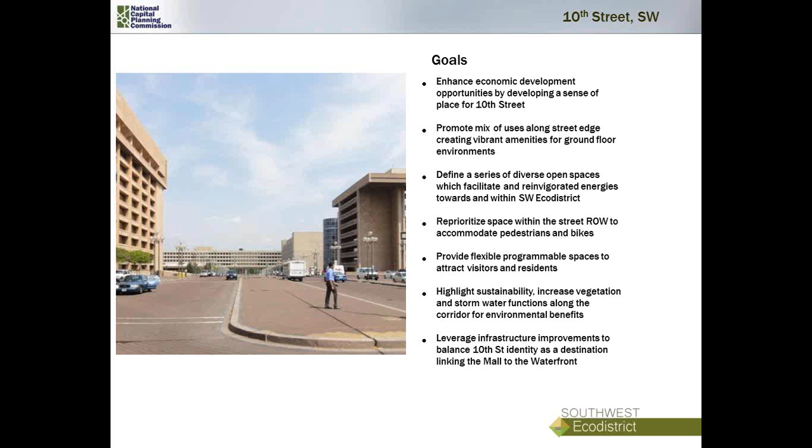So one of our first strategies was to think about, as 10th Street becomes redeveloped, the opportunity for infill and landscape interventions within the street right-of-way for stormwater management, that the buildings adjacent to the properties have to really embrace a vertical and green approach, and then the infills themselves may be either commemorative or part of the landscape. These are just some examples we've been using to illustrate the ideas that might be developed.

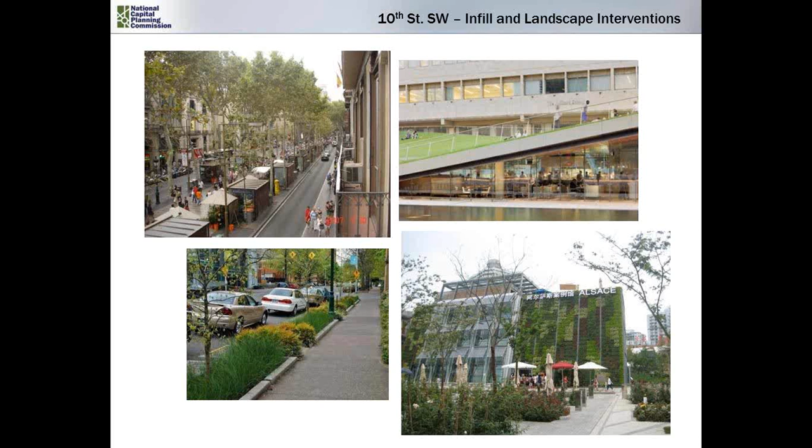Currently, these are 3 just preliminary approaches or concepts that we've developed. The next phase is to develop them further.

These were done in order to identify how much area we may be able to capture for stormwater management, and what the sense of the space might be—currently the right-of-way is about 225 feet, building face to building face. If we narrow it down to a more typical DC right-of-way, about 110 feet, what does that get us in terms of land development, and what's the resulting public space?

So these are 3 preliminary ideas—actually 4—looking at the creation of nodes, shown in pink and yellow, of plazas or infill features, and also how the roadway and the tree canopy might interplay to create a sense of the appropriate monumental street.

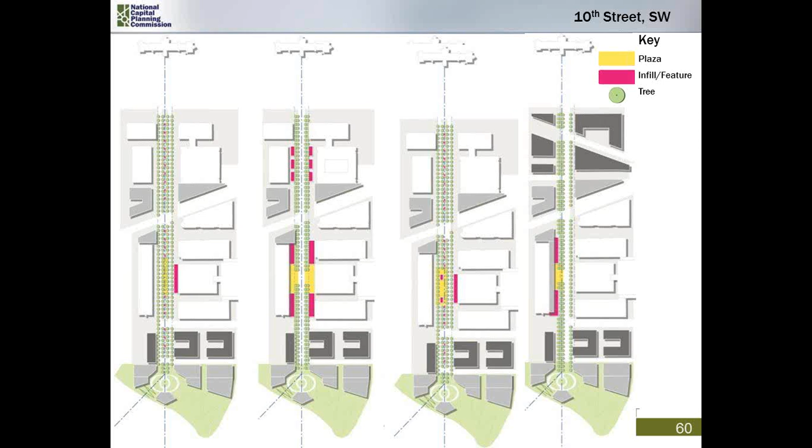So the next one here, you'll see the dark gray is where the existing building faces are. The lighter gray, where it says redevelop, is where it's reducing from 225 down to about 140 feet right-of-way to create the view back to the castle. This is the boulevard approach, creating a more central spine for pedestrians and activity, with a uniform tree canopy and carriageways on both sides of the central median.

The next one is, perhaps the roadway should be down the middle of the street to really create a view back to the castle. Some of the discussions were: is it better to have cars have the view, or should you put the pedestrian space down the center of the street? Here, the trees would then be a more condensed canopy on each side of the street.

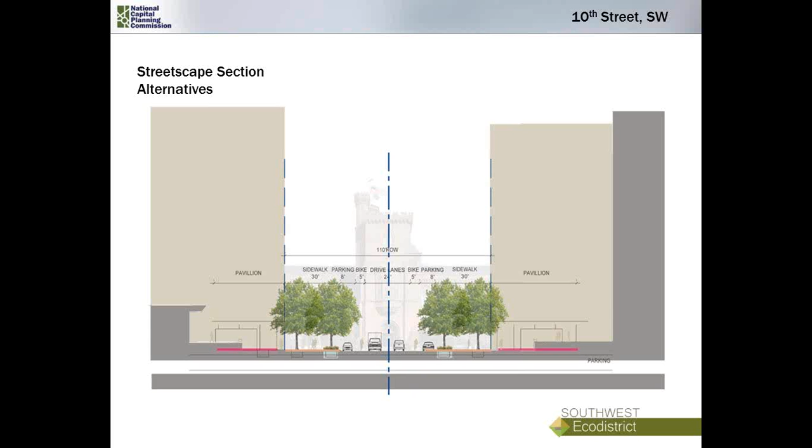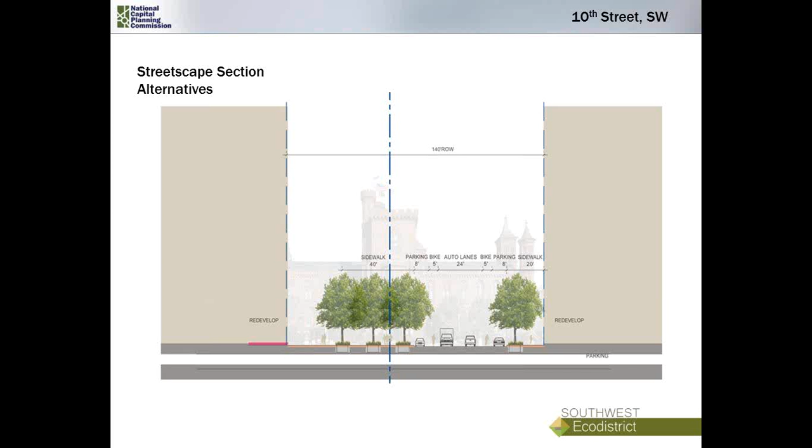The next one is maybe we shift the approach for the cars and make it an asymmetrical section to really create that strong central pedestrian spine, and then have the development a little bit asymmetric to the right.

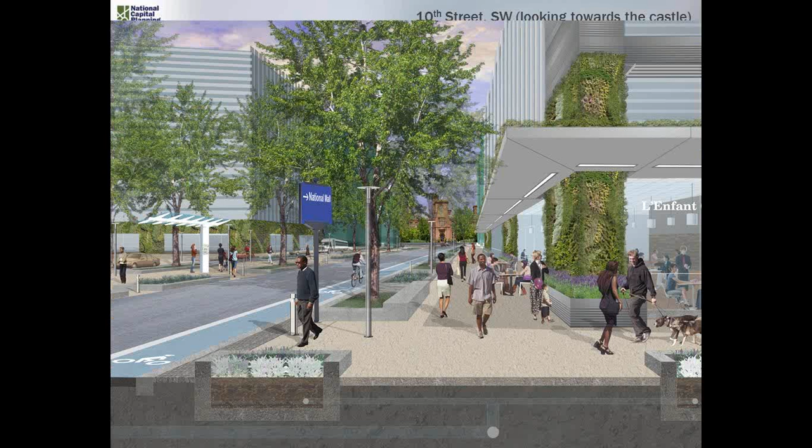And so here, again, is how it currently exists, and you see the Department of Energy building spanning over the road. This is an illustration of all the strategies that may be utilized in order to reinforce the street.

We're showing vertical greens along the buildings, stormwater tree wells with seating, LED lighting, multimodal or bike lanes on the street, while maintaining the view back to the castle. I'll say this one is still in progress. It was really trying to identify all the strategies, and we're still looking at how to make this a little bit more monumental in scale and feel.

So I want to turn it back over to Elizabeth to talk about the business case.

So that was a snapshot of the big ideas coming through with our land use, transportation, and environmental strategies. Before we wrap up, I wanted to give you an overview of where we're heading towards implementation. We have actually done a conceptual cost-benefit analysis for this area.

I'll say right up front, we've got a lot more work to do, and we're actually in the process of doing that. So I don't have all the answers at this point in time, but we definitely have a feel and a grasp on what our costs and benefits are going to start to look like.

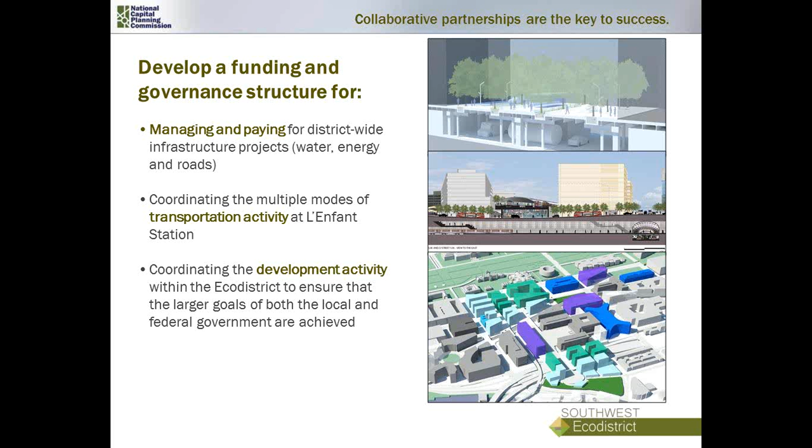But I guess just to wrap up here, what I'm pleased to say is that we've gone from working on the Monumental Core Framework Plan, where maybe our vision was a little bold for the time, but within really a very short time period of just two or three years, we've got a lot of federal and local interest in actually trying to make these things happen. But we also realize that we have a big road ahead of us to make it occur. So with that, I'm going to conclude, and we're going to open it up for your questions.

Okay, well thank you, Elizabeth and Otto. So we've had some questions come in. The first one comes in from Richard. Were metrics or standards established that specified what percentage of the area must be either open space, pervious pavement, or green vegetated areas? You can have open space, but too much of it can be hardscape, i.e. pavement, and not enough actual planted areas, or flowers, or trees, or shrubs.

In our modeling, we made various percentage assumptions for all the horizontal surfaces in terms of the proportion of hardscape versus landscape, and then also looked at, depending on what the landscape was, the potential capture of stormwater if it was a flow-through planter or such. So we do have it, and we actually had a kind of range of numbers for that, and that's part of the next phase, when we'll look at the design of 10th Street in more detail, where we'll really get into the numbers of percentage of hard versus soft and what the impacts or influences are for stormwater management.

And just to add to that, the city is actually doing some pretty aggressive sustainability policies, and they're looking at what they're calling a green area ratio of, I believe, 35%. That actually includes roofs, green roofs, green walls, and pervious surface on the ground, or green area on the ground. And we're actually looking to try to exceed that standard as well, because we are going to be an eco-district.